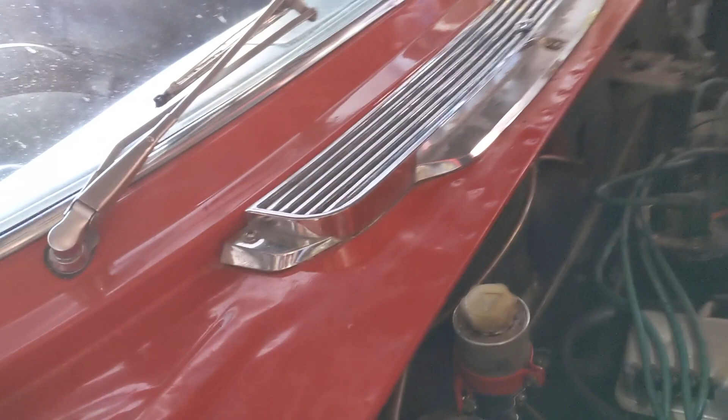JFDI. That's where I've got to. I can't think of anything else now. I am still waiting on this pipe replacement, but if that's what's causing all of the issues, well, I'll be surprised.

So I want to turn the car around, because it'll be easier to work on if I have it the other way, since I can get it up without having to back it out of the garage and back in all the time. So I'm going to bleed it so that I can move it a bit, because that seems to work short term. I'm going to clear out the other side of the garage, take it out, back it back in, lift up the front, and take out the gearbox.

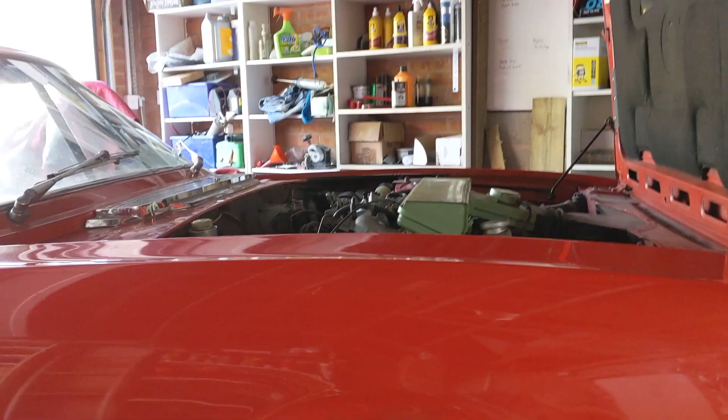Here's the thing. I've just bled it again, and there was air in the system. So it's getting in somewhere, and I just can't work out where.

So what I'm going to do is leave it overnight with some paper under it, so I can see if there's anything dripping out just from sitting, and that might give me a hint. I'm going to wait for the new pipe to turn up. Maybe the threads have gone or something, I don't know, but somehow maybe that old pipe is leaking, and we're going to put that in.

Now, I'm not saying that the bearing doesn't need changing, because I think everyone knows it does, but what I am saying is I don't want to do it yet. So I'm going to look for another excuse not to. I feel like I'm destined not to drive this car this summer.

I was checking on where the connection pipe was for master to clutch slave, on the clutch. Realised I hadn't pressed the actual order button to pay for it, I just set it all up. So I had been expecting it today. I pressed to buy it today, and the delivery time's gone from 2 days to 2 weeks. So I'm not going to be doing it for a while.

So I'm going to check underneath now and see if there's any leaks there. I'm then going to bleed again and see if there's any air, and then I'm going to turn it around so that I can actually take the gearbox out.

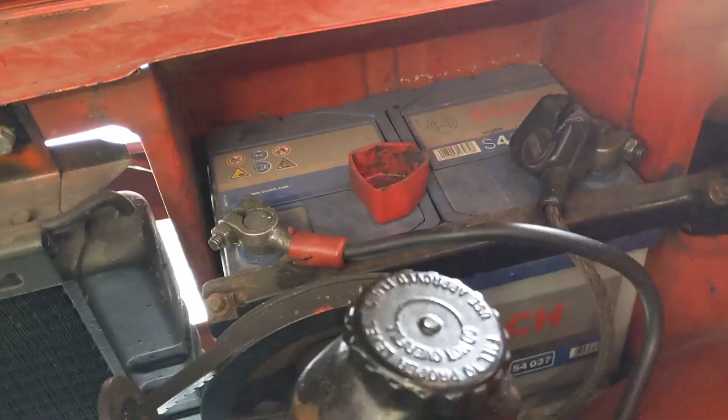Right, so we've loosened off and disconnected. I haven't loosened that side yet. So that's the battery off.

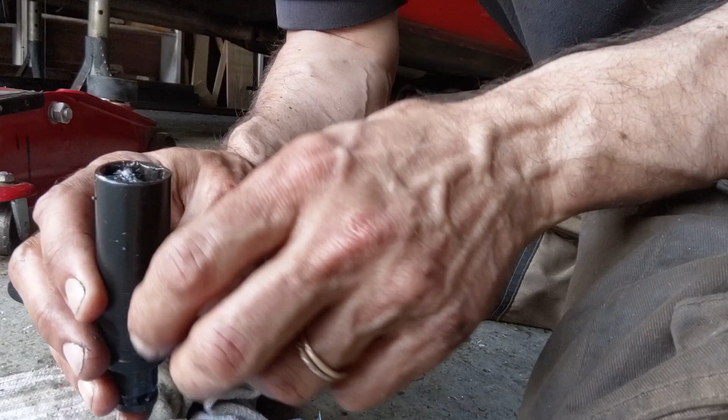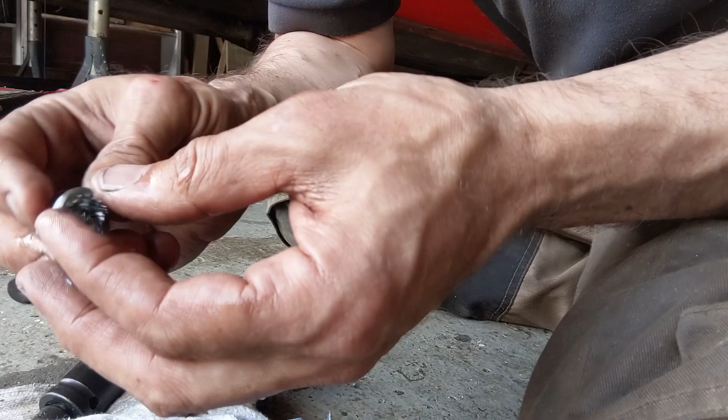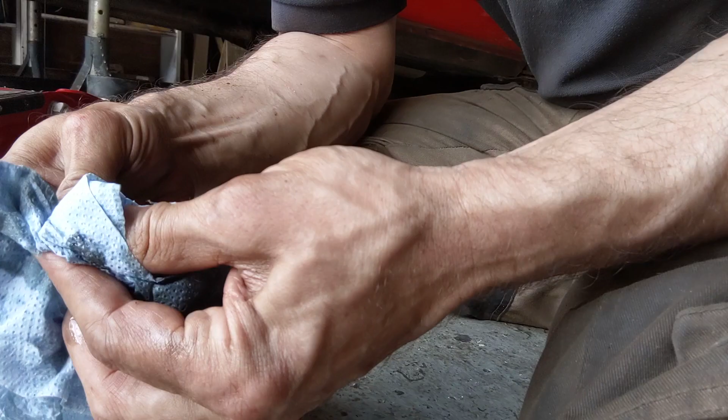And the next step is to undo the gearbox drain plug. Okay, whilst that drains, this is what came out. This is magnetic, so you can see all the little bits of metal that have stuck to that. The oil itself doesn't look all that bad - actually, I don't know what goes in, so I don't know what colour it's meant to be. But it smells a bit, in terms of how it looks I've got a little drop here on the floor next to me, I'll show you.

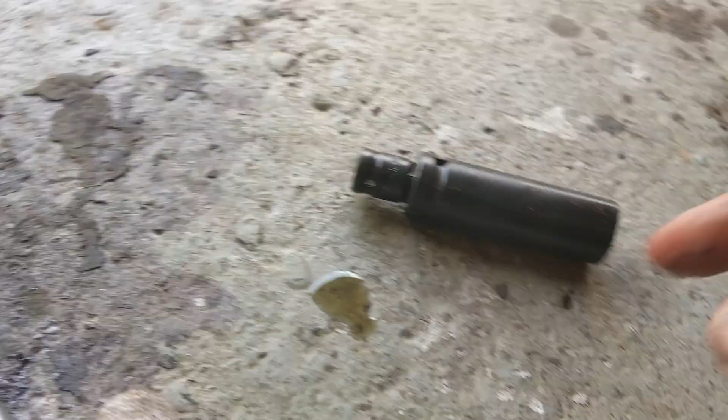So you can see the colour of the oil that's come out, which, you know, it's still oil coming, it's not gone black. So anyway, the next step is to drain the cooling system and disconnect the top hose from the radiator and disconnect both hoses from the heater.

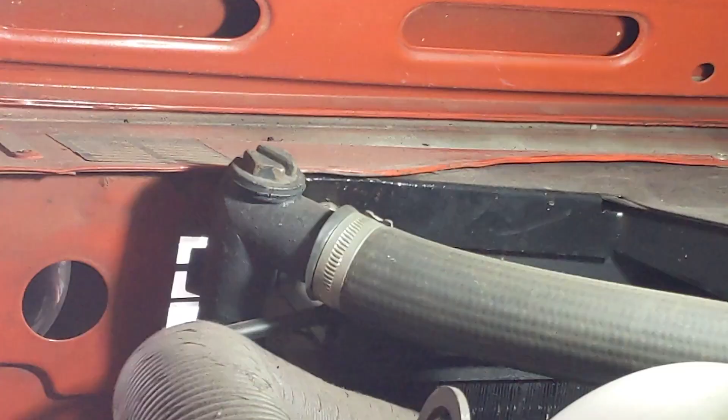So I need to put my temporary bonnet stay in the way again. So this is the top hose. Okay, now we're going to drain.

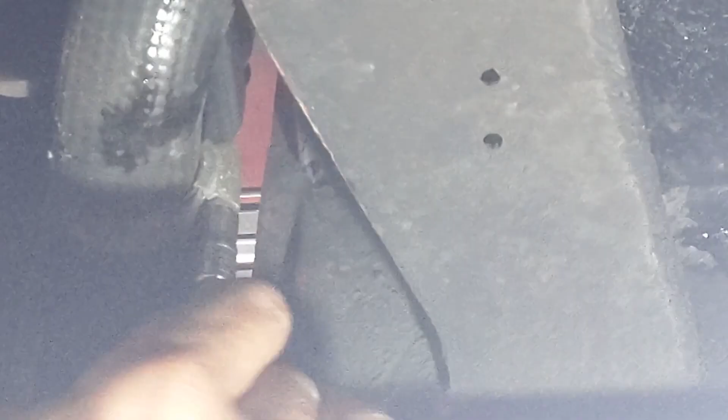Ah. Ow. Oh, sugar. Well, that went everywhere.

I'm pretty soaked as well, so I'm just going to dry this up. I'll put the pipe back, dry it up, probably change shirt, and then I'll be back.

So here's what came out in terms of colour. I lost a lot of it, but it all looks pretty good to me.

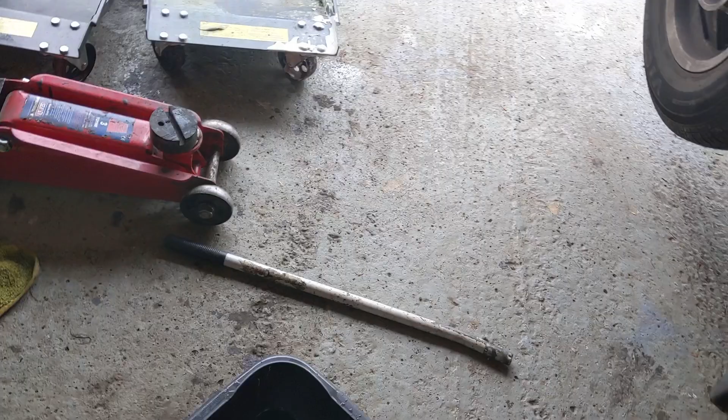Now it says to disconnect from the heater unit, and I just don't understand why I would do that. So I'm not going to, and I just need to remember that when I get to it, if it suddenly is catching on something. The next step is to remove the gear lever knob.

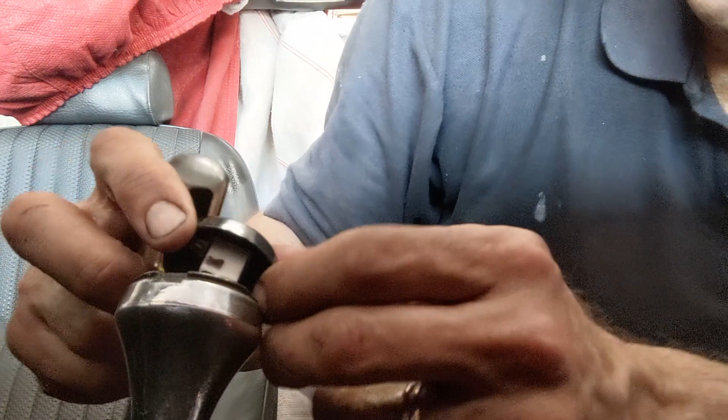Now the Stag has overdrive, so you have to take this off first and disconnect the wires, which are going to be truly easy to do.

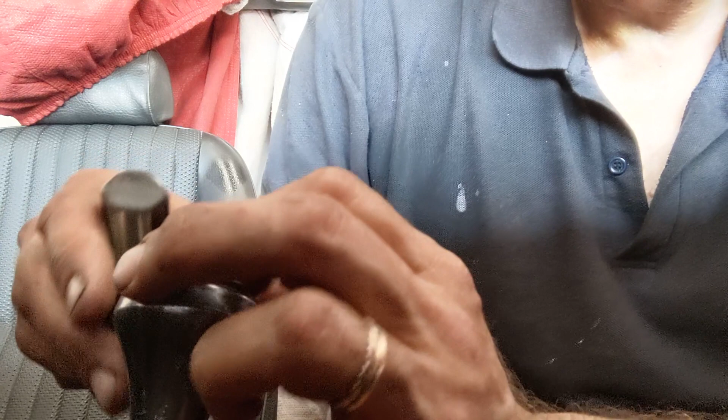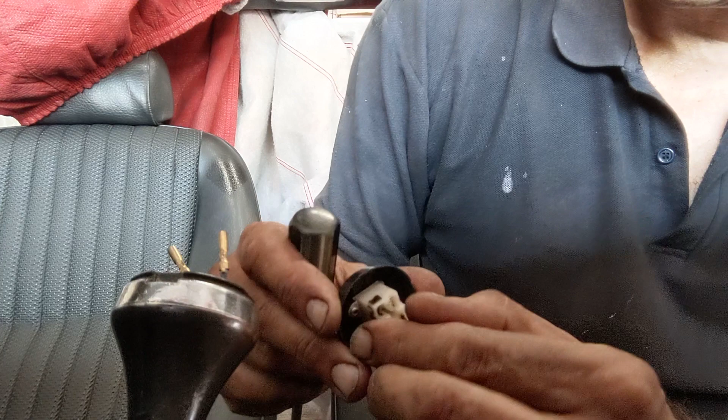There we go. Now then, how are those in there? Are they just pushed in? Right, so as I'm facing it, brown on the right, blue on the left. Probably doesn't make any difference, but it might.

Okay, and then I need to... I hate these things.

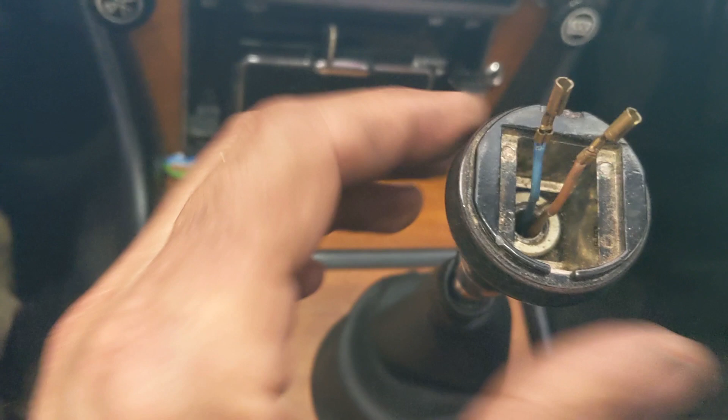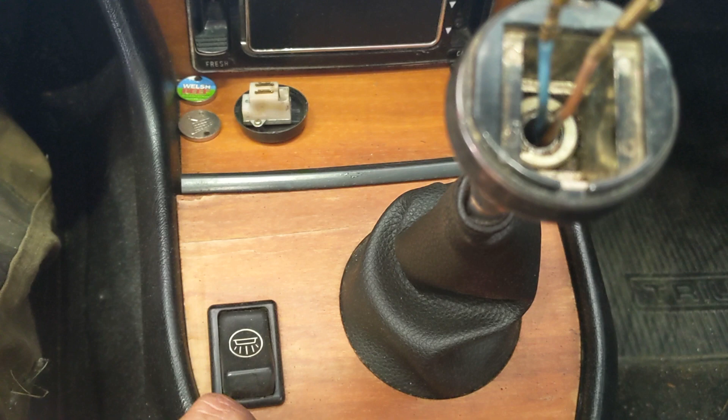So the Stag is like other MG, British Leyland cars of the time. With its overdrive, you have to hold on to this and loosen that up, which is just done with a couple of screwdrivers. I'm going to do that off screen because I just can't get a camera in position to do it.

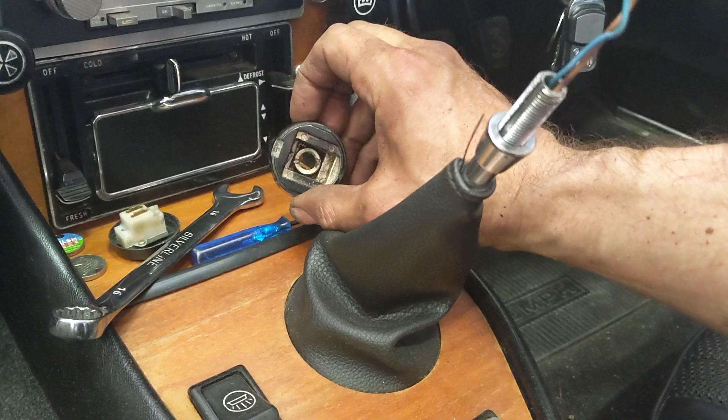And there it is, all off in its glory. So this just unscrewed a bit. You then use a screwdriver into the notches here to twist it the other way and get it off.

So that's off. Right, so we next want to get the console tray out. So that's just a small screwdriver in here, and it should pop up.

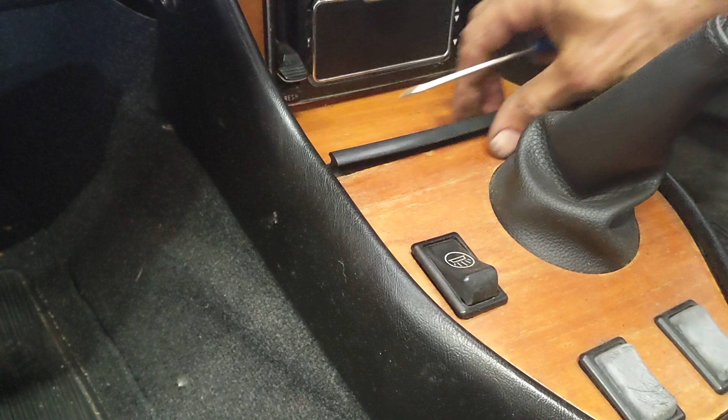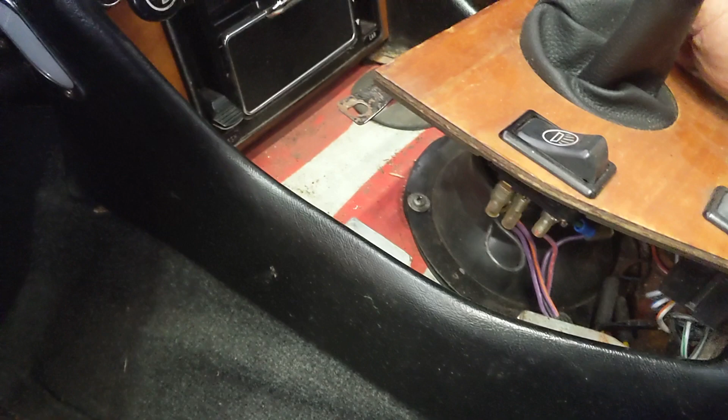And then behind that we have 2 screws, which again, I can't hold the camera and unscrew at the same time, so we're going to take those out. With those out, this now comes out, but I've got to be careful about the wiring behind it. I don't want to do any damage back there, so I'm just going to switch you off and take that out manually.

And there it is off. It goes then that way. So let's see what the next step is.

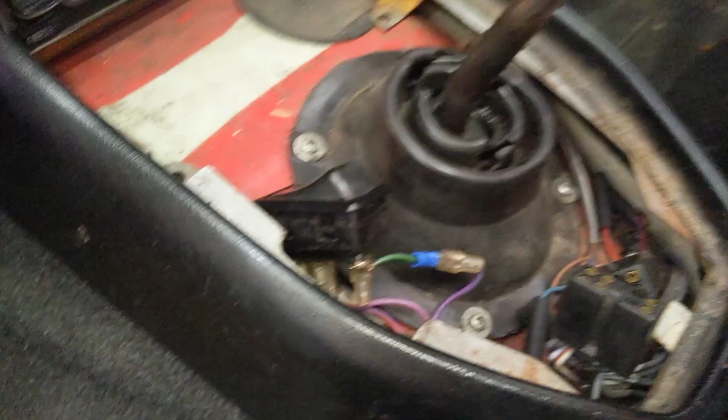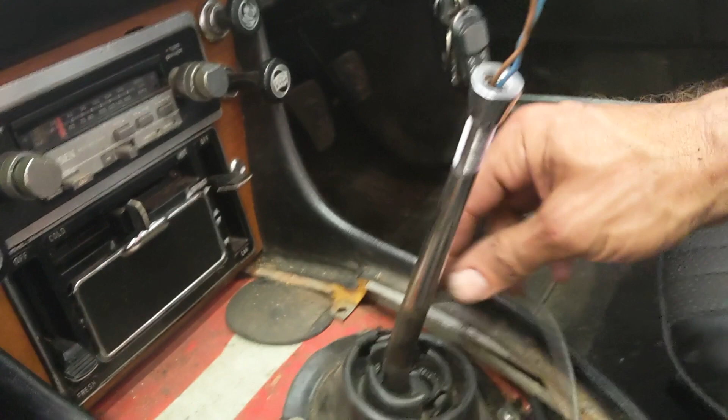Okay, next to come out is these 4 screws, and then we lift out this rubber gaiter. We might have to work out how to do it, maybe pull the wire out or something to enable that to happen, because I can't see otherwise how it comes through. I suspect the gaiter was meant to go over it in the first place or something.

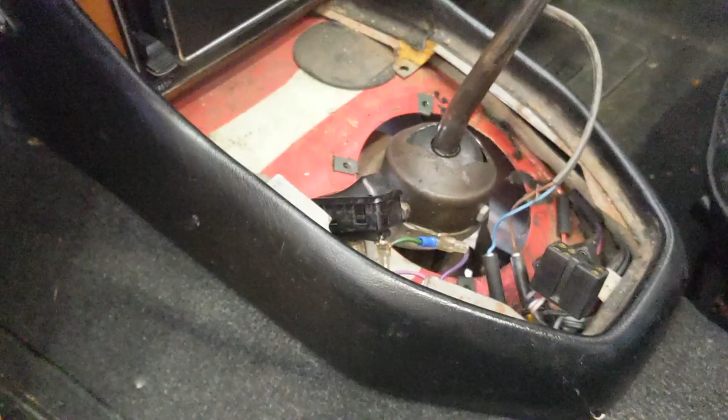Right, rather than pull the wire out from here, I'm going to disconnect it down here. That should allow me to get these off, then I'll reconnect them. There we go, that was easy. So I've only temporarily put those back in, but they're there so that they're ready.

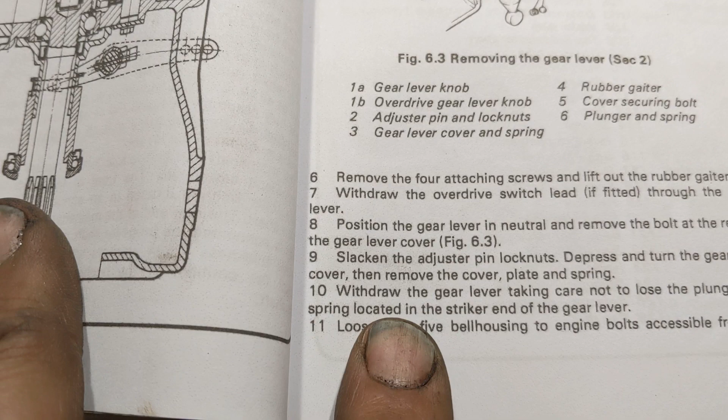It says withdraw the overdrive switch lead if fitted through the gear lever. Well, I'm not doing that. I've only just read that.

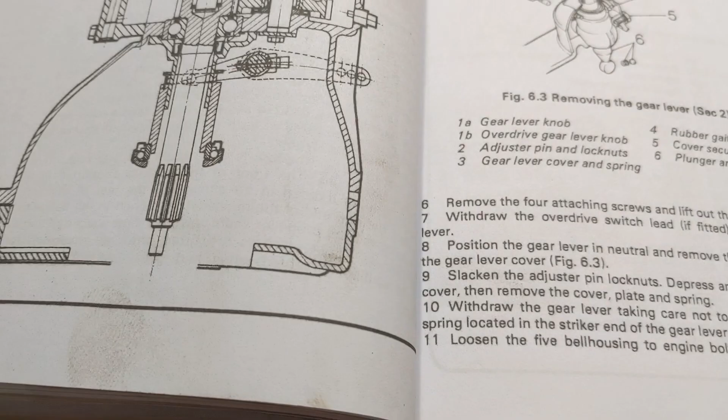Right, position the gear lever in neutral and remove the bolt at the rear of the gear lever cover. So this is the bolt I need to take out.

Unless I'm actually removing the gear lever, which I might be, I haven't read ahead - if that's coming out then I can leave these wires connected, but if it's going down then I can't, because clearly those wires need to go somewhere. So I might have to disconnect them here again. I'd rather not take it out of here because I can see that being very difficult to get back in.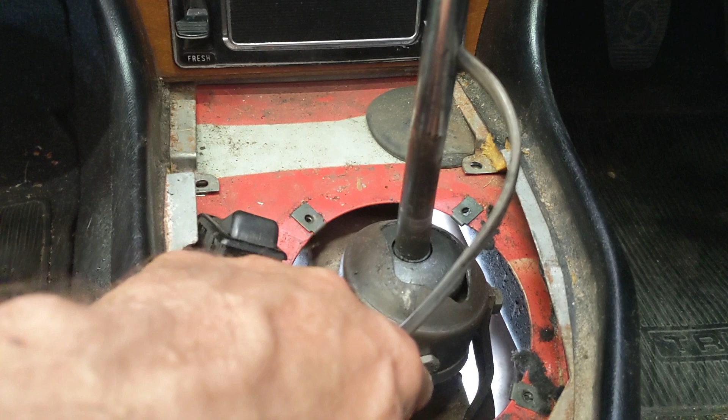So we'll get this off. Again, it'll have to be off camera, and then look at what's next. So with that out, the nut out there, we depress and turn this to remove that.

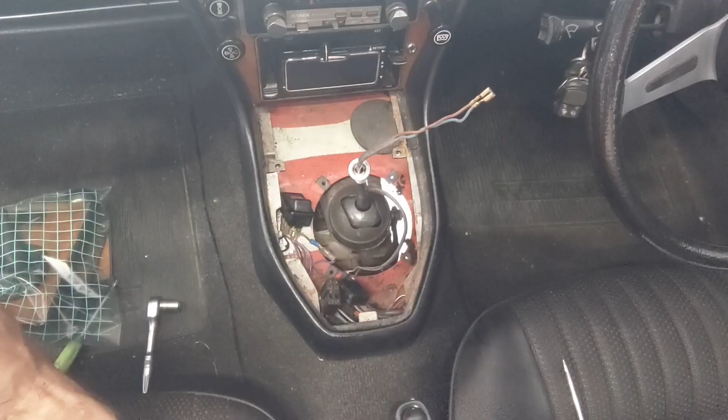Right, I think we're getting to the trickier bits now. Withdraw the gear lever, taking care not to lose the plunger and spring located in the striker end of the gear lever.

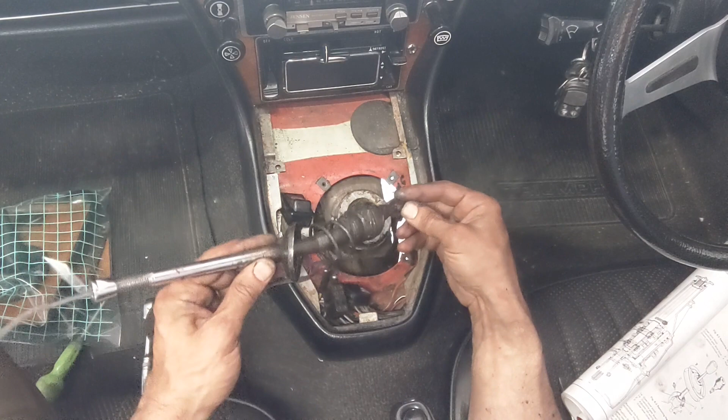Well, that seems to be everything coming out. So I'm just going to lie this down - just going to find something so I can lie this down safely.

Loosen the 5 bell housing to engine bolts accessible from the engine compartment. I think it's an interesting definition of accessible, and I'm trying to work out which the 5 are still.

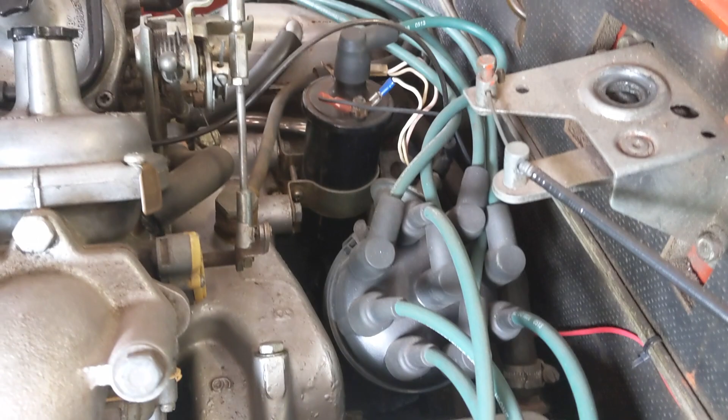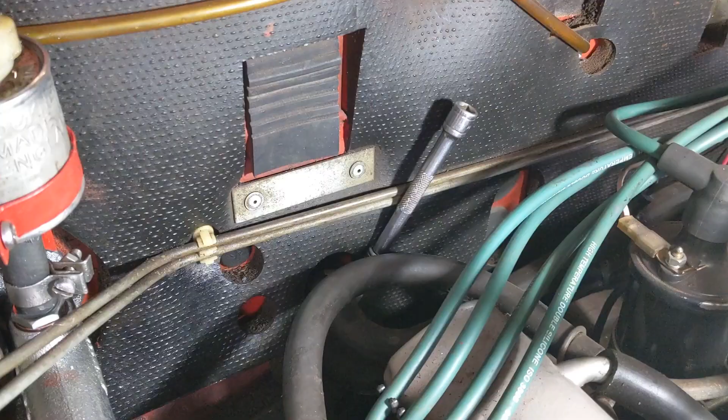But I think the reason for removing the heater hoses is to give access to them. So let's try popping off the distributor and seeing what it looks like. Okay, we're going to remove the heater hoses.

I've decided to go back a few steps to check I'm okay, and I'm looking at this plunger and spring. So this bit, which I'm meant to be careful not to lose, clearly goes in there, and you can see.

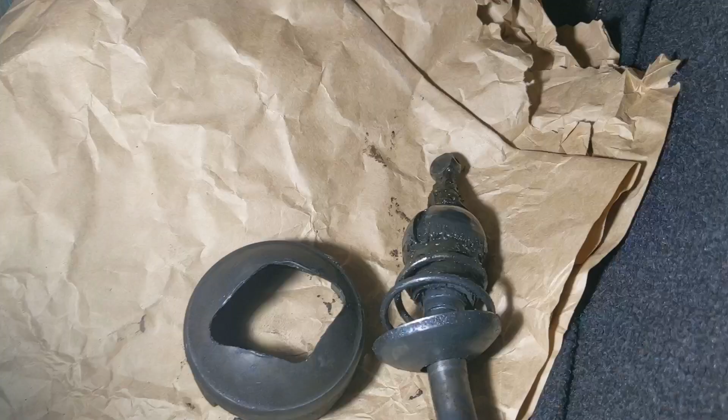Let's see if I can set this up better. This is my third attempt at recording this. So I went back to look at the plunger and spring, and I realised that it's meant to go in here.

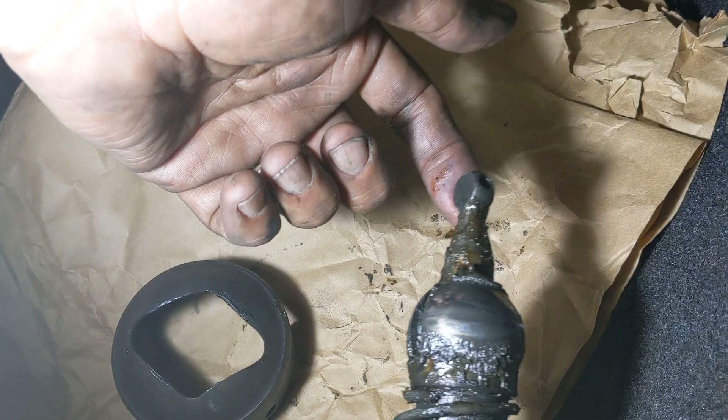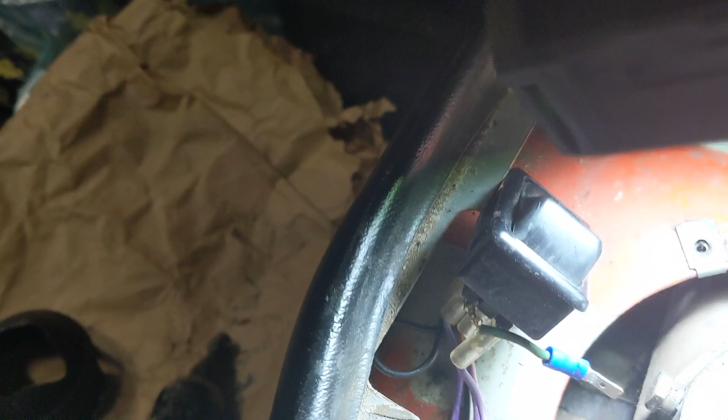There very obviously isn't anything in there, and I've been hunting around for it, seeing if I could find it, if it's popped out somewhere or fallen onto the ground. I've been under the car looking for it, and I can't find it under the car, and I can't see any sight of it here.

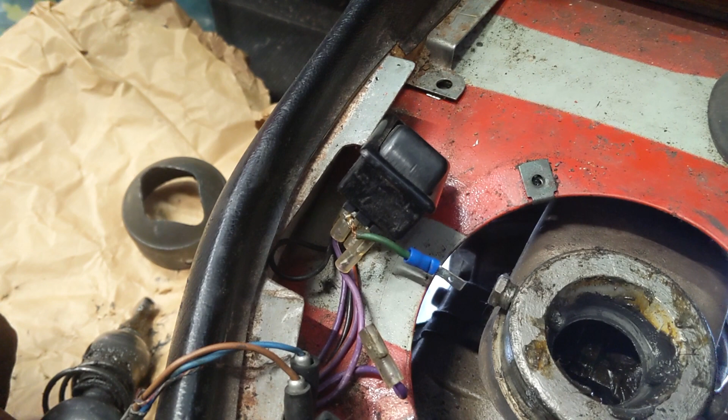So I don't know if it's not had a plunger and spring in there for a while. I don't know if that's even possible, or, well, I just don't know. So I'm going to have another hunt for it, but I'm going to stop for now whilst I look into this.

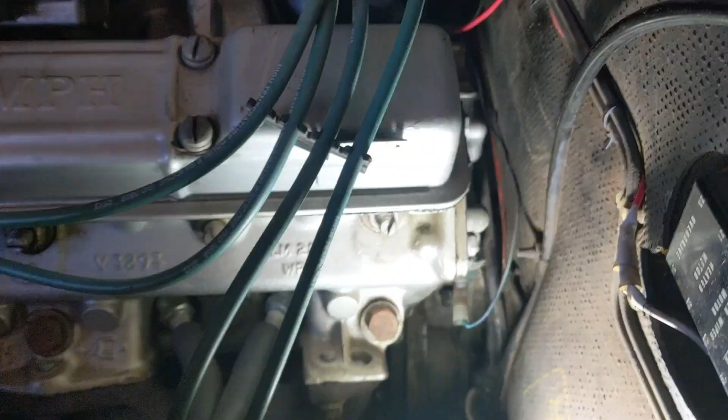It says there were 5 bolts to loosen within the engine bay, and I can't work out which 5 those are, so I've loosened more than that.

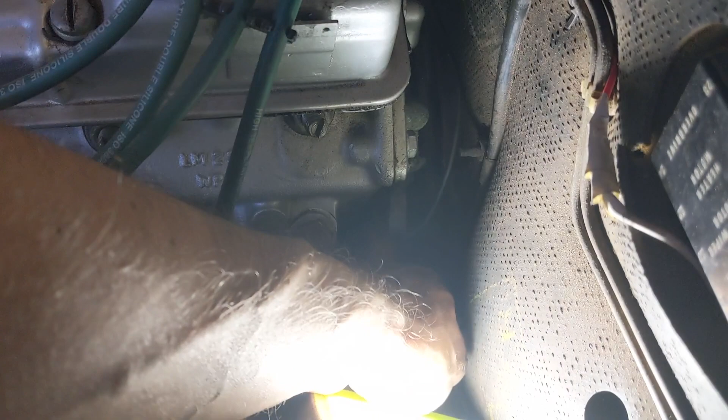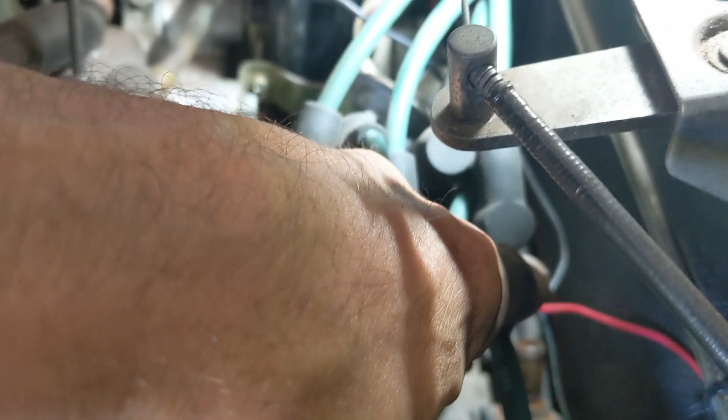So these are meant to be from engine to bell housing. There's one here you can see. There's one up behind the transfer housing which you can't see. How you tighten these up again, I don't know, but alright. Then there is one in there which hopefully you can just about see. One further over, and then there are 2 or 3 down the other side.

So I've loosened those. I haven't taken any of them off, I've loosened them all. And we'll go from there.

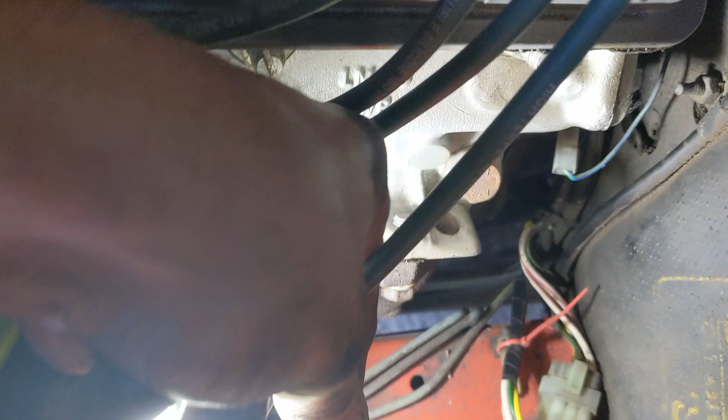And I've just noticed, and I don't know if I've done this just now or if it was broken before, but I've noticed this here, which I suspect goes in there. Yeah, almost certainly goes into the brakes, especially given the way it is sticking there. I don't know. Anyway, I just noticed that wire.

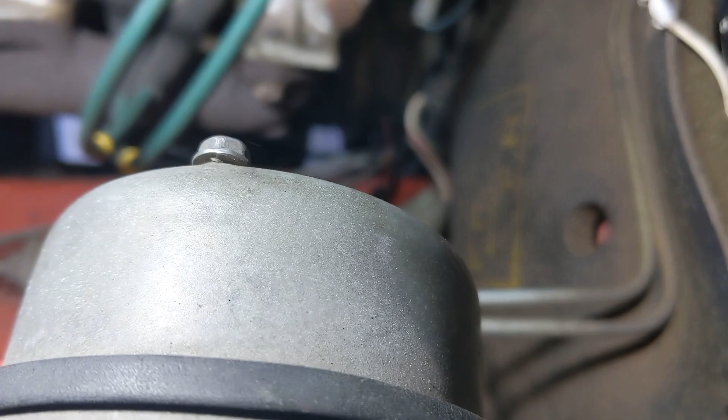Where's it from? Hanging loose. So if anyone does know where that goes, I should appreciate it, because I just stuck it in there for now.

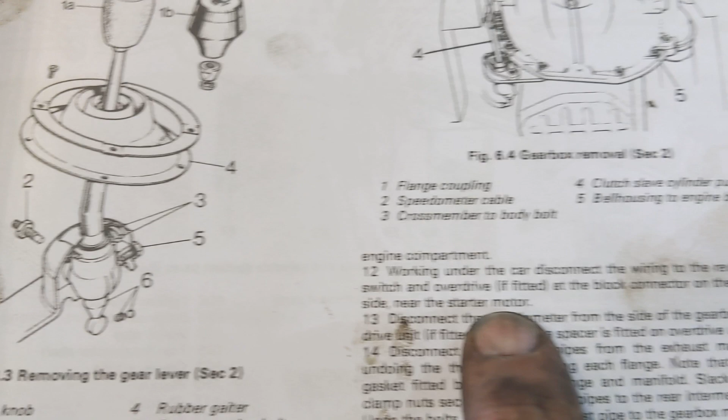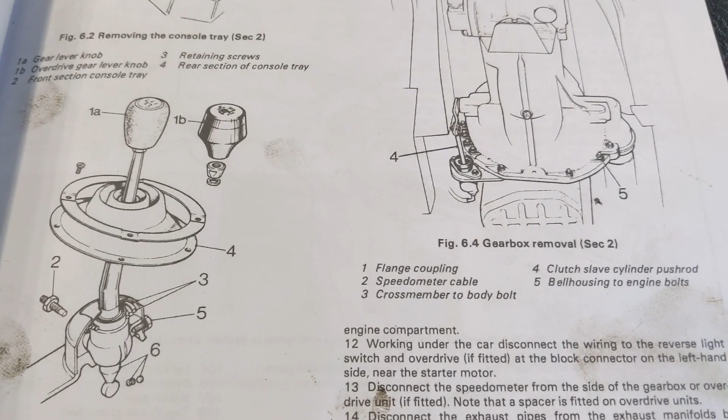Anyway, so I've loosened them off. Next step: working under the car, disconnect the wiring to the reverse light switch and overdrive, if fitted, at the block connector on the left hand side near the starter motor. Well, we have the starter motor here, and I cannot see any connector around here underneath the car for anything.

So what I do see, I guess, is, where's it gone? Here, this wire here. Can I get that into view? So we've got this wire coming from the back, which I think probably goes to the overdrive, but that's going straight up. So I wonder if the connector here has been moved up there.

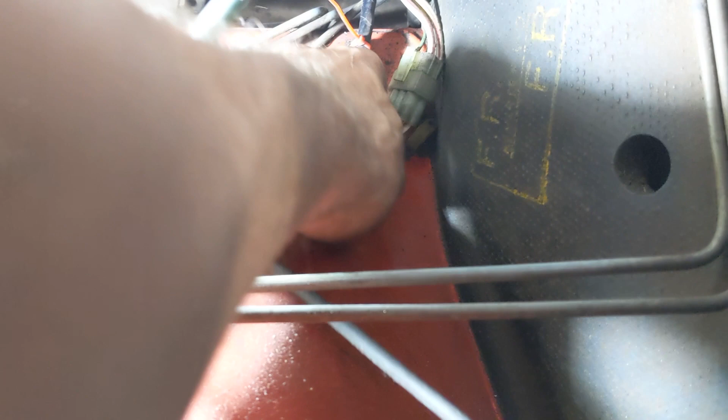So here we are above the car, yeah, and I think that's most likely. It looks to me like this is probably what they're talking about, and it's been moved up top here and connected off there.

So if I break that and unclip here, I think that's probably good. So that's what I'll do. And there we have those bits unclipped, so that can go down out of the way.

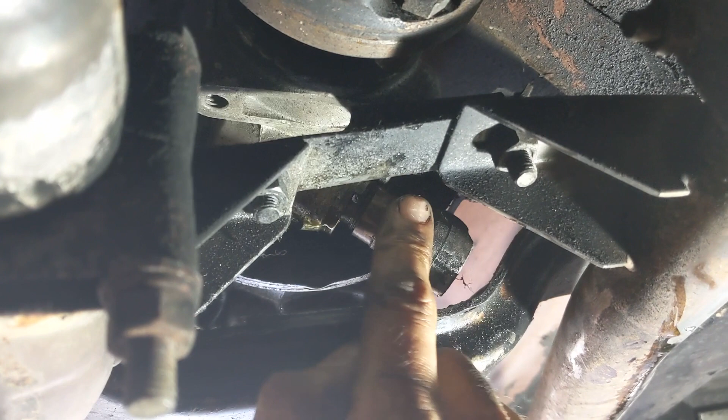Okay, I'm underneath the car, and this is the speedo unit cable, which I need to disconnect next, and I think that's just this bolt back here. But I can barely get under to do this, so I certainly won't be filming it. I'll just try to take that out.

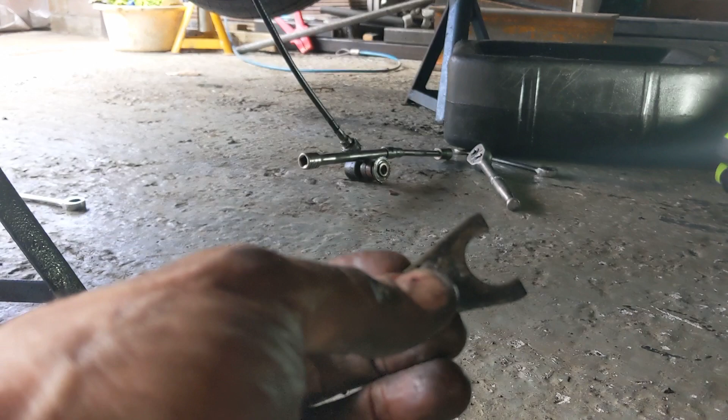Right, getting that out was not easy, but there's the cable, and this is what holds it in place. And the problem is my 7/16 is just a bit too long to go in comfortably, so I couldn't move it. I couldn't get my hands in there. Ratchet sockets wouldn't fit.

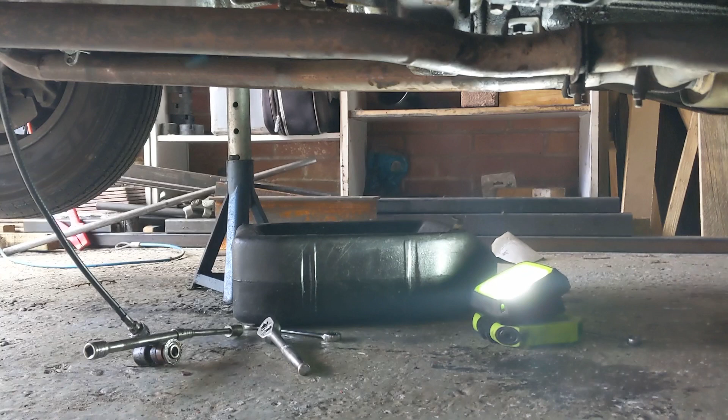I mean, there's just no room at all. I think, to be honest, the hanger needs removing in order to do that. So maybe when putting it back in, I need to support it on a stand, on an axle, and then put it in, and then put in the transmission supporting bracket. But there we are.

Right, the next step is to remove this middle section of exhaust. That means I have to undo these 3 bolts for this pipe. There are 3 bolts in there that I need to get at. One is totally inaccessible behind all of this stuff, and behind the silencers I need to remove that as well, and then lower it all out from the middle back there.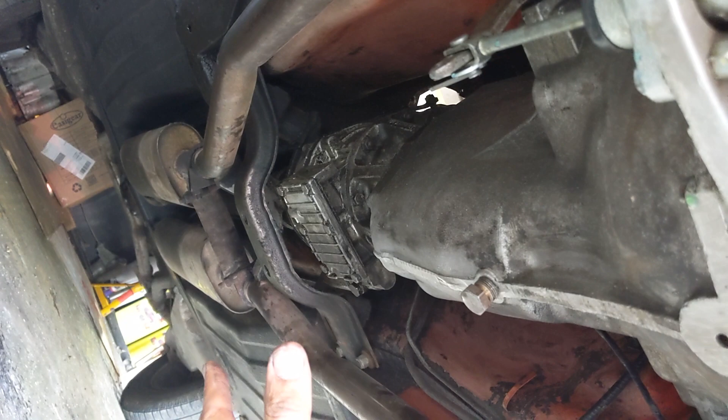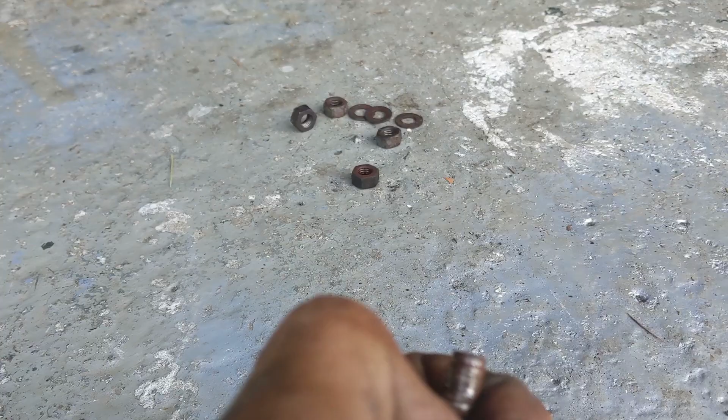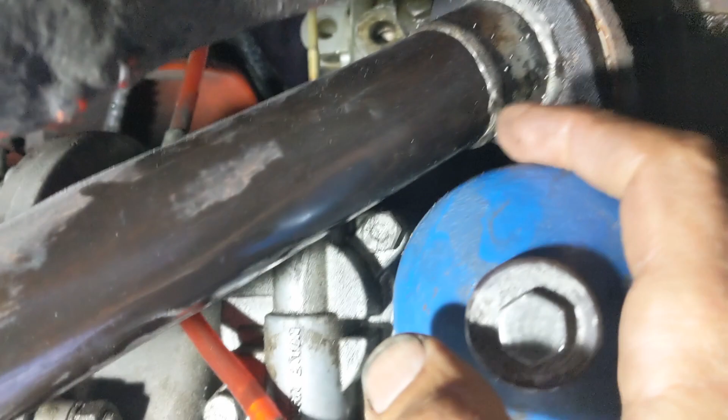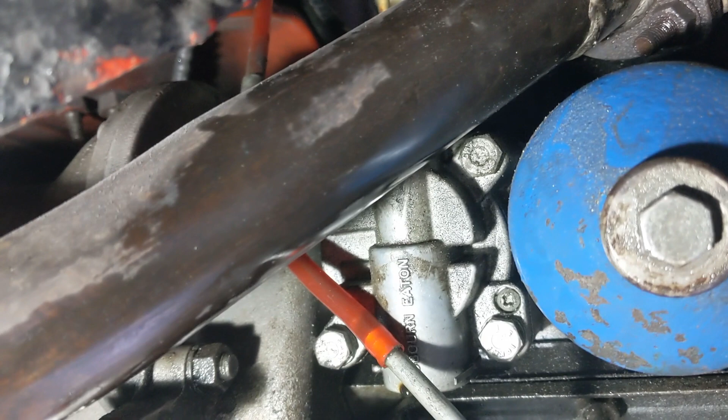Right, at the front I've taken out 4 nuts and 1 bolt, and that bolt looks like, I don't know if I can feel any thread there, so I think I might have to buy a new one of those. But there's one in here which I just don't see how I'm going to get at without taking out the oil filter, so I'm going to take that out even though it's not on the instructions. Drain a bit of oil there and then have another go at it.

Okay, so with the oil filter off, we've got all of the nuts and bolts off from the front of the exhaust. So let's go look at the back now.

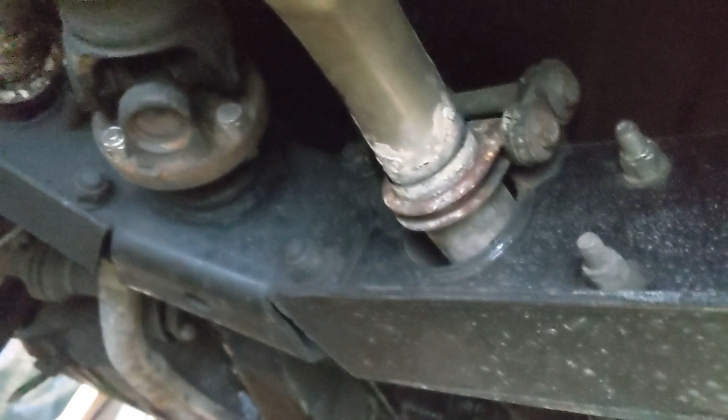So this is the rear of the car, and we need to slacken off the bolt there and on the other side so that we can withdraw the pipe. Right, to loosen them off at the back, and the last bit is to take this bolt out, and then in theory you just slide it out. I'm sure it'll be that easy.

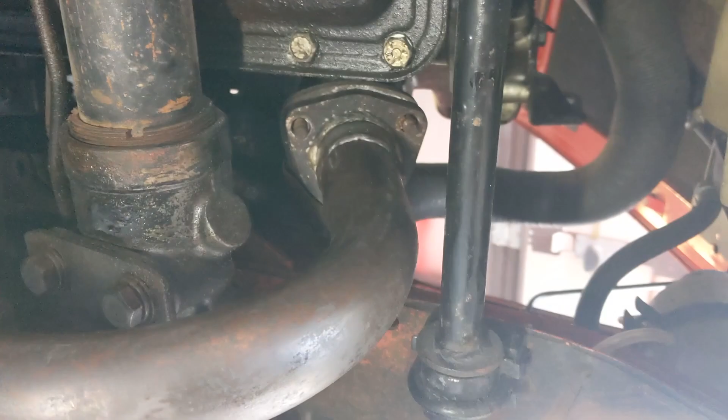Right, well, the bolts are released everywhere, but this won't budge at all. That's with me, I mean, that's just my weight, but it's not coming at all. I've tried, I can get a screwdriver onto the edge here, and then I've tried with my mallet from above to try to tap it loose. Nothing.

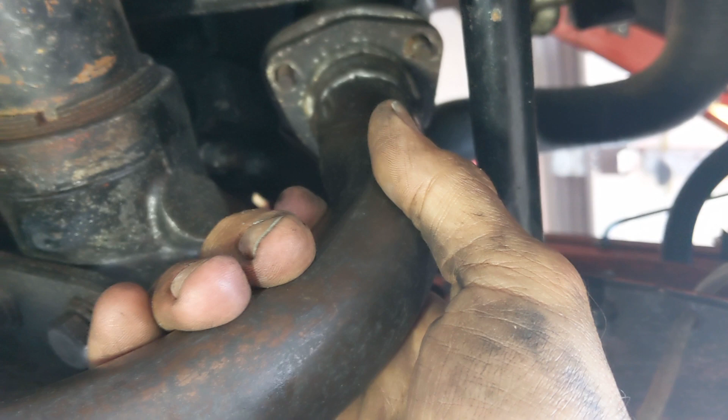So I'm just thinking, because I don't want to, I mean, I've got a good exhaust system here and I certainly don't want to have to replace that. So I'm trying to work out how to do this without damaging it.

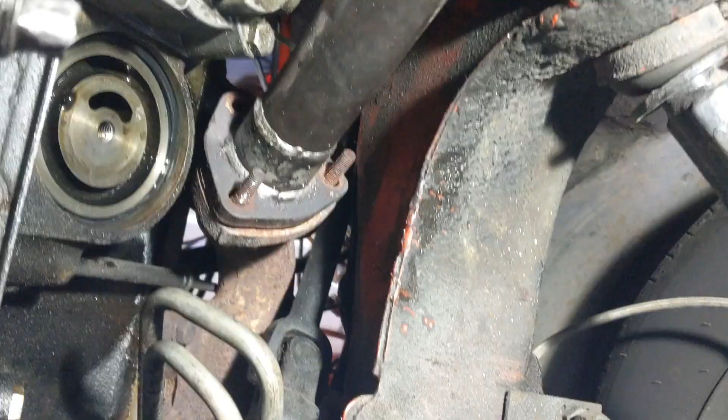This is the pick, and this is the crowbar, which I've been using to try to get out the exhaust. I'll show you what I've been trying to do. Okay, so I can't get these exhausts to move at all, so with the pick I've been trying to get into the gap here and just scrape bits out to clear it off, and then I've been using the crowbar here to try to get some force onto it to pull it down.

It's not working. The progress, I mean, this one looks like it's beginning to move a bit. You can see a bit of a gap here. This one, where's the light gone? This one, not so much. So if I use the crowbar here, it just makes the back move. So back there, it just makes that lot move, as opposed to up front.

Now, when I'm looking at these bolts that are in here, see, so that looks to me like this one needs to come forward to come out. This one here, it needs to move backwards to come out. Alright, back there, you're upside down now, but back there, I'll go down and show you. Back there is now back here, and you can see that these actually need to squeeze together to come out, and forward, okay?

And they can't squeeze together particularly, apart from just that little bit, because in the middle here, if we can get it in the middle here, just before the silencers, the mufflers, we have a connector. And so I can't work out how to get it out. I mean, nothing seems to want to move at all. And I don't know how to do it.

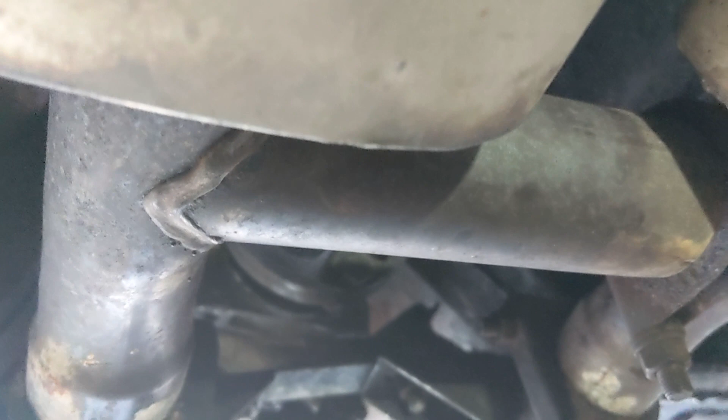So I did try a little bit of heat, but not much, because I get very nervous with heat anywhere, up front near the engine, or anywhere near a petrol line. And, you know, these things are, so I don't know what to do. I've just been lying here on my back trying to work out how to get this exhaust out, and I cannot work it out.

So if anyone can give me some thoughts about what to do, I'm going to stop this video here and call this part 1 of removing the gearbox assembly.